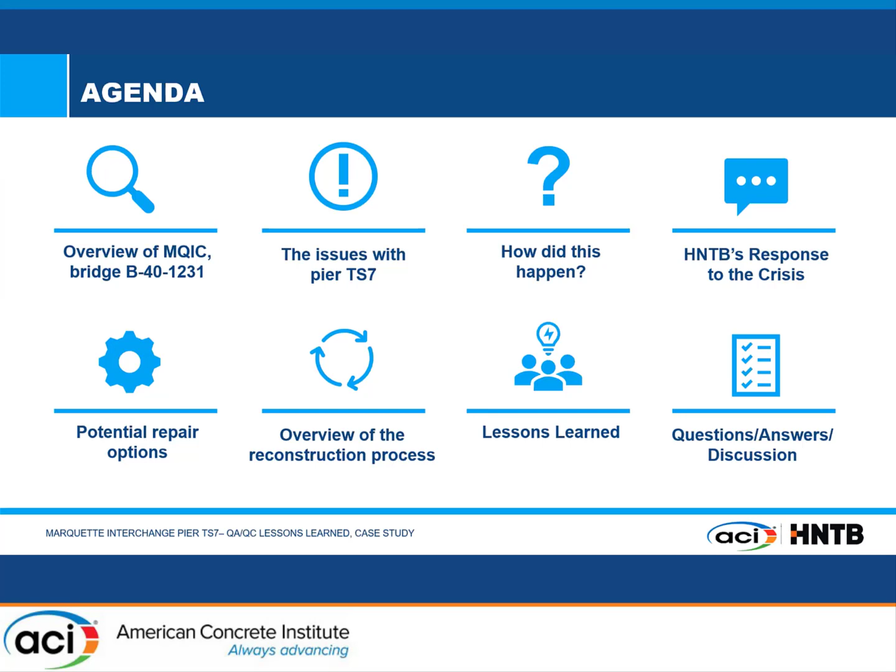So we got engaged right away, and went on the site and started taking pictures of our own. So this is the Marquette Interchange. I don't have enough time to explain all the ins and outs or how many people use it, but it's a beautiful project right near Miller Park.

HNTB has done a few projects here, including the twin cable stays and twin bascule bridges that you see in the background, only half of the symmetrical bridges, and the Marquette Interchange, as we said. All these curved girders were beautiful steel tub girders that also match the colors of the nearby Marquette University, that is the Golden Eagles basically, and they use blue and gold for their colors.

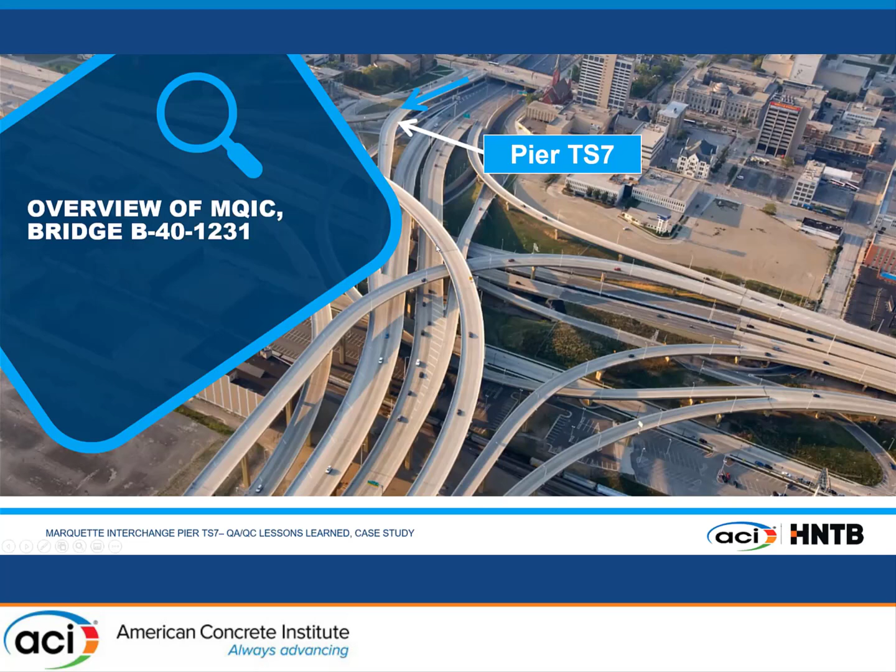This was the particular pier. It had interference from below in the clearance of the vehicles. So somehow somebody in the last moments had pushed the pier about 5 feet. So this is the particular pier and the cantilever. You can see they look like hairlines from afar, but they were not very small.

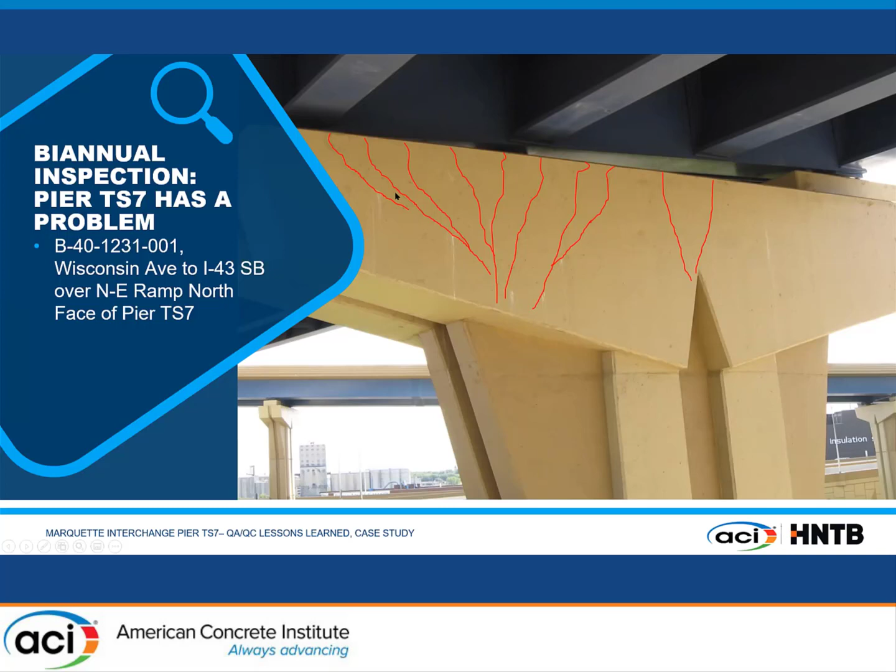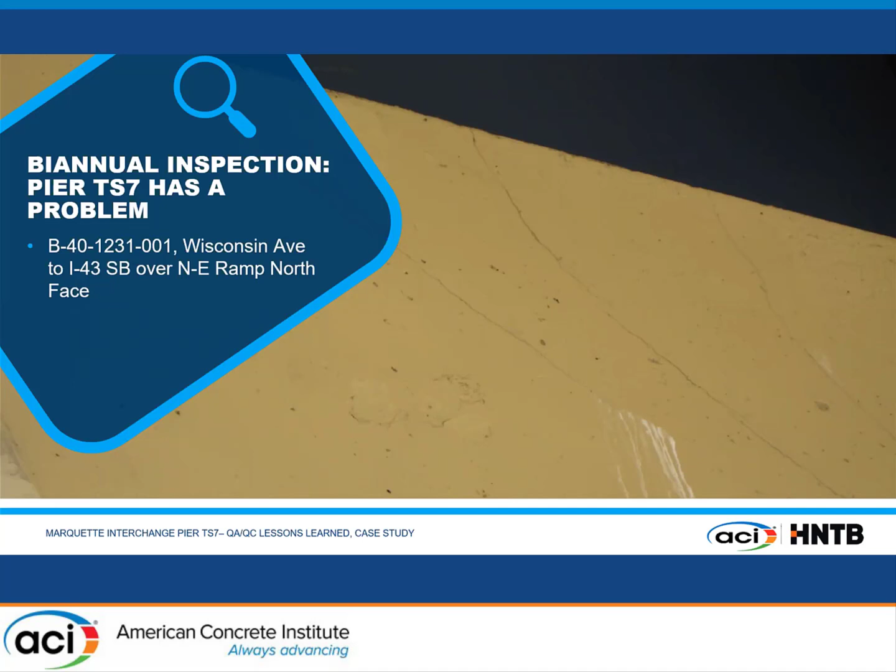Once you put the tracing on them, you can see that, when you went to that advanced concrete class in school, they told you, I bet, just like my professor said, that it is the shear cracks that you should watch for in concrete. So this was worrisome to us. And looking from a little closer, they're still manageable. You see efflorescence, but still scary that they were progressing as we move forward.

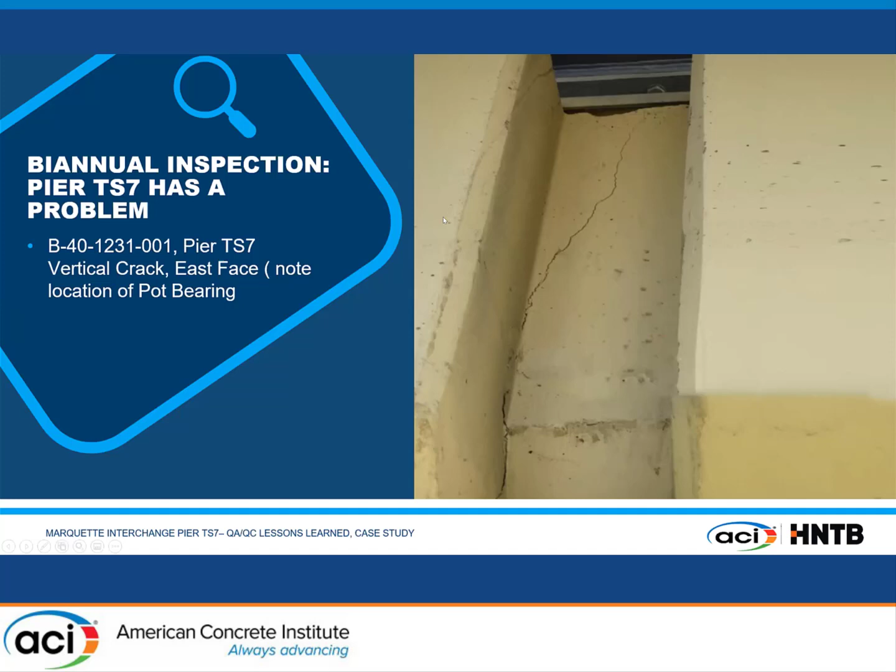There was also, because the pier for aesthetic reasons was built in like two panels. They weren't really panels, it was mostly ornamental, but they were reinforced accordingly. And there was a crack right in the middle of it, so that worried us as well.

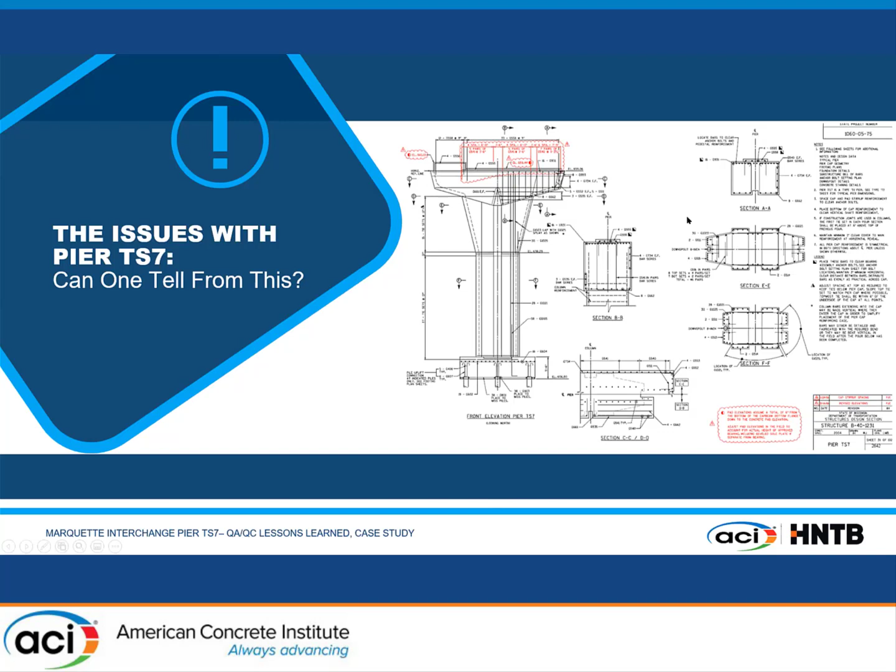First thing you do, you go back to the drawing board and you start looking at, hey, what is going on? Why is this pier cracking? And if you look at section AA at the top right of the screen, it looks like it's not reinforced very well. So you go down and you see what's wrong with this pier.

Piers were classified in certain groupings, and we had short and long piers, and then we had piers for one lane and piers for 2 lanes. So the cantilevers were longer. And here are some of the piers. So you see that these piers, if you see the types, 2 piers is TS5, 6, and 8. 7 is missing from here. 7 somehow was put together with the other piers, with TS1 through TS4.

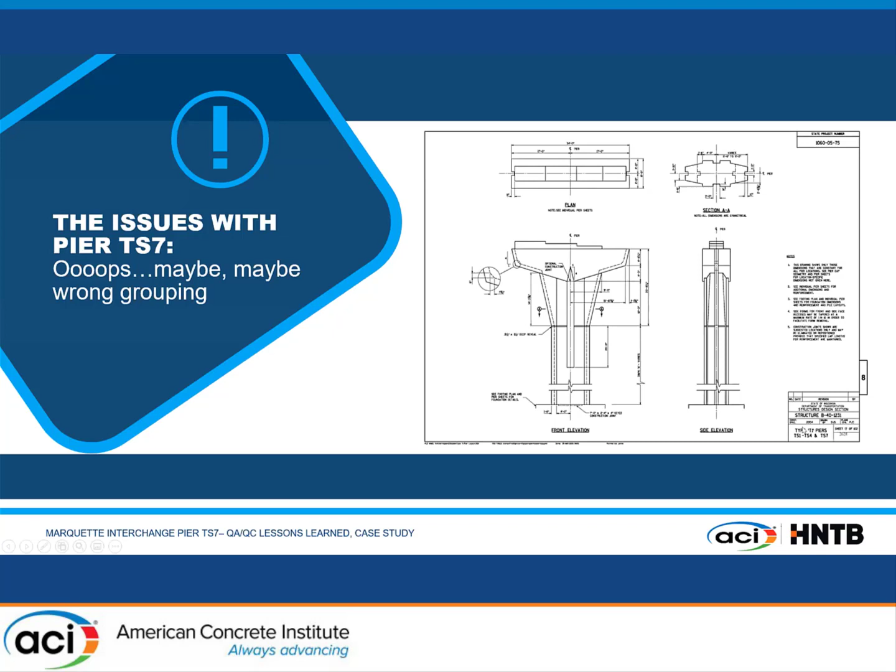Why was that? So we look at the regular piers for Group 1, and they were designed kind of like this, right? But then somebody got creative, got this pier and shifted it 5.5 feet this way because they realized that there was a conflict in the last few weeks of the project, and they said that this pier has been designed, let's just use it in here.

Just notice, I'm going to go back one slide again. Notice that this is carrying only one girder on the fascia over here, but over here now it's carrying basically 3 girders because it was an integral steel cap. All these three girders, the resultant goes right on the cantilever, which was not designed for and was replaced in a hurry. We couldn't figure out exactly how, 3-4 years after submittal.

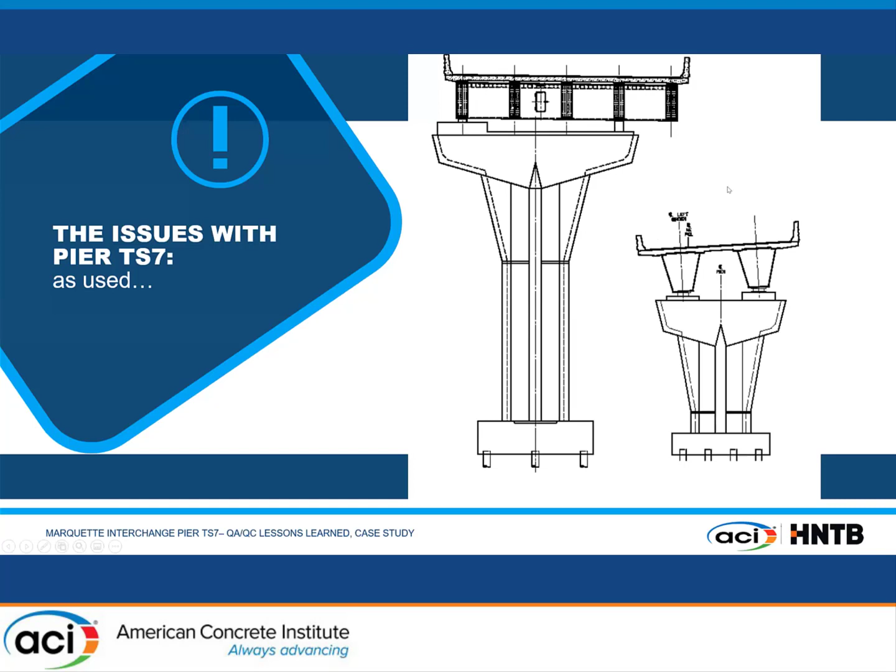But this is the piers. We got short piers and we got tall piers. And here in the bottom, if I was to draw a vehicle coming on the shoulder, you'd see that if this pier was 5.5 feet, it would interfere with that vehicle, just like that.

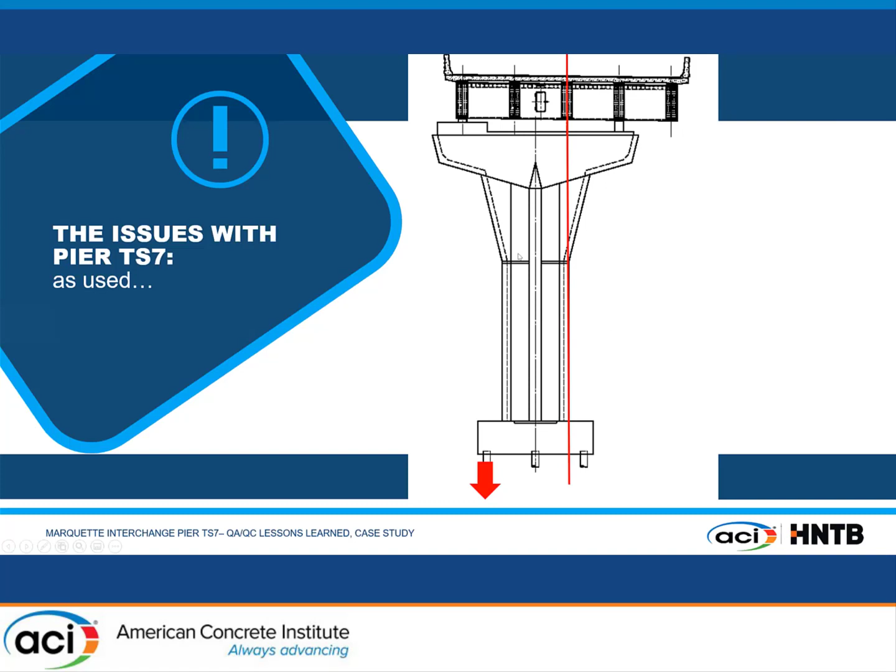Okay, and that's why that shift was done. So all of a sudden, you got the resultant of all the forces, the reactions coming into the pier with an offset of about 5.5 feet. What that causes is not only the cantilever, the whole thing was in trouble. The shaft and even the piles were in uplift.

But hey, it had not fallen. The beauty of concrete, right? It offers ductility and it tells you that it's in distress. So we were lucky that way. It was carrying live loads for 2 years, and nobody had noticed any serviceability issues.

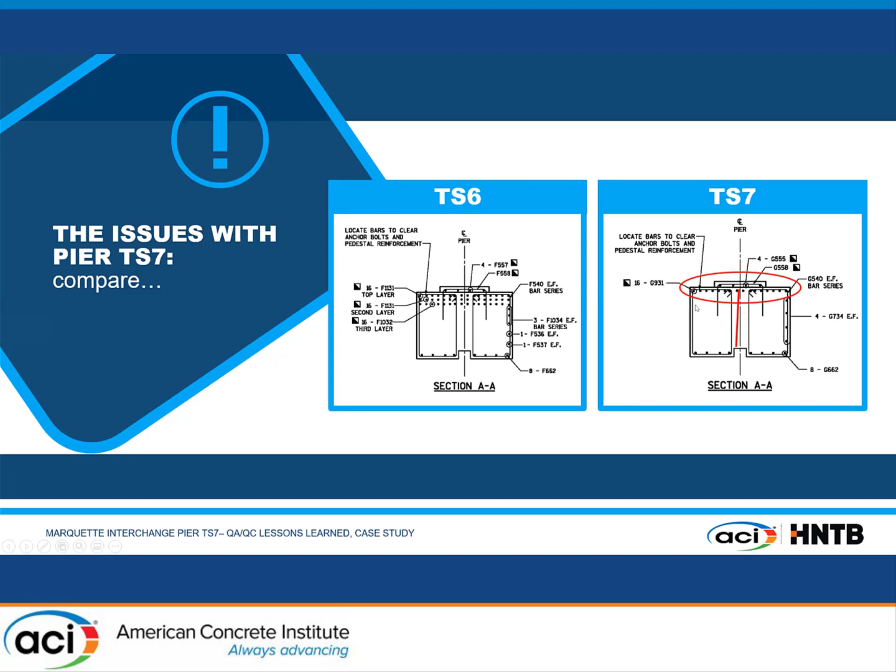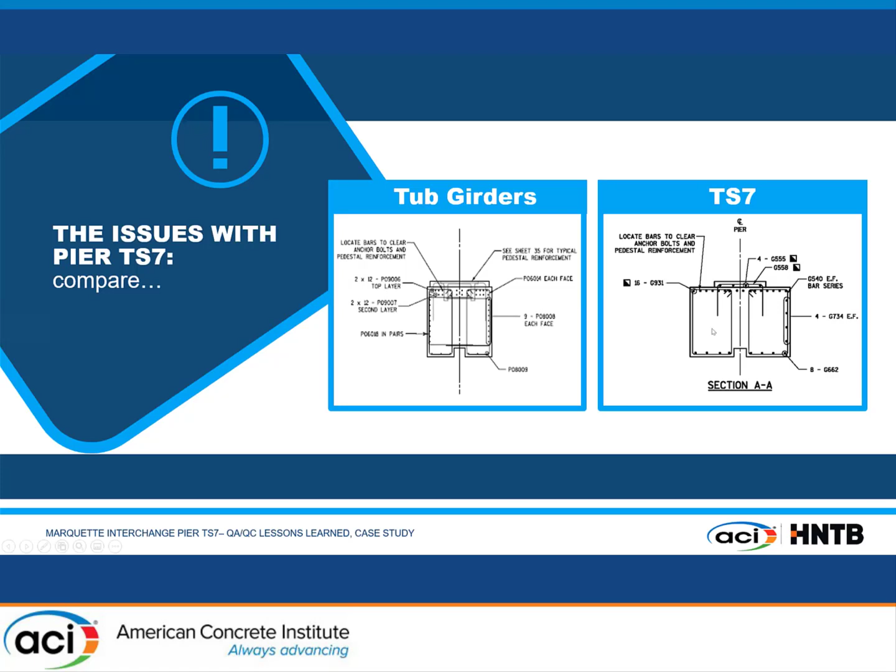The other thing over here, you can see that this crack happened right in the middle because it was reinforced with 2 hoops around. This never happened in the project with steel tubs because we had put on top of it also an overall stirrup that took all of that. You can see TS7, this was for tub girders that we designed, and you can see that there is a stirrup that envelopes everything. And over here, these are 2 separate stirrups that are not linked together except for that U-shape that goes on the bearing, only at the bearing location.

We went through hoops to verify that, hey, it's not fallen. Maybe there is some capacity. You can see that even for self-weight on service load, V only for dead load was at 114%, never mind live load. For moment was below, and V total, 81%. So live load, dead load for the service load, nominal, no factors, we were at 81%. So well below the acceptable. There wasn't much. Then in the pile loads, you can see axial capacity, 0.7 demand capacity.

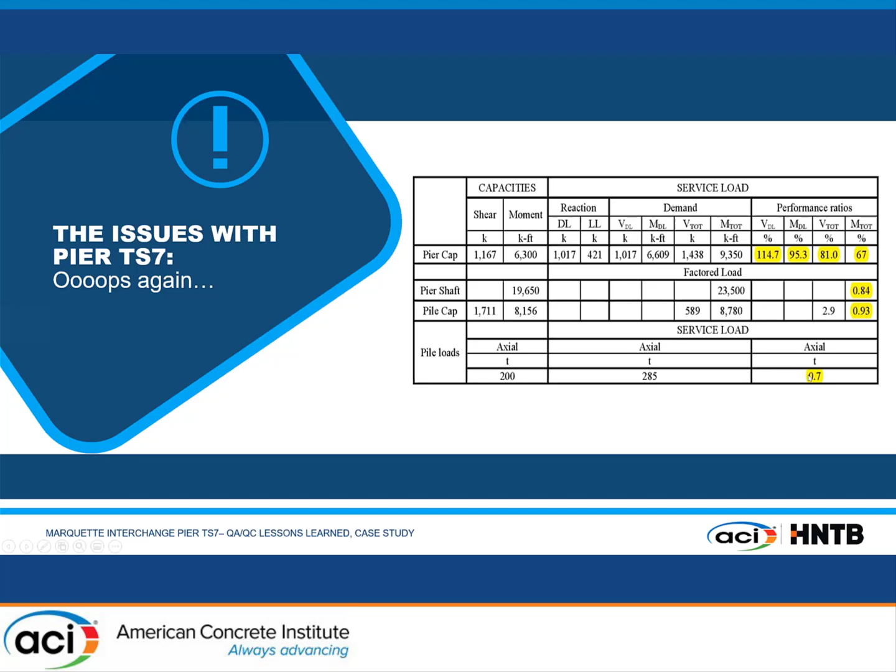So it was scary. And it was the weekend before Labor Day in Milwaukee. So we got called in, and we never went home for 2 or 3 weeks working on this until we put it back on track. I'm not going to talk much about the logistics and living through it, which was a story in itself, with the newspaper and all the commentators saying, hey, who did this should be hanged in Milwaukee and stuff like that.

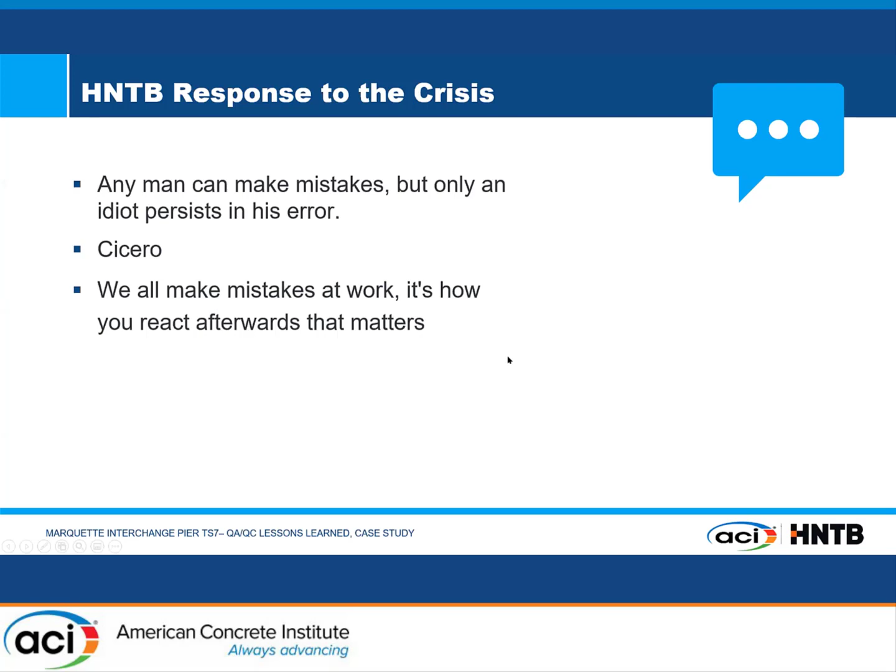But at the end of the day, we realized that, hey, you do 256 piers, sometimes stuff like this happens. So any man can make a mistake, but only an idiot persists in his error. So we couldn't go and tell the dude, yeah, don't worry about it. This thing was doomed. So we all make mistakes at work. It's how you react afterwards that matters. And that was our motto. So we got with the DOT right away. We called the secretary. We said, close the ramp until we verify, and we put it back.

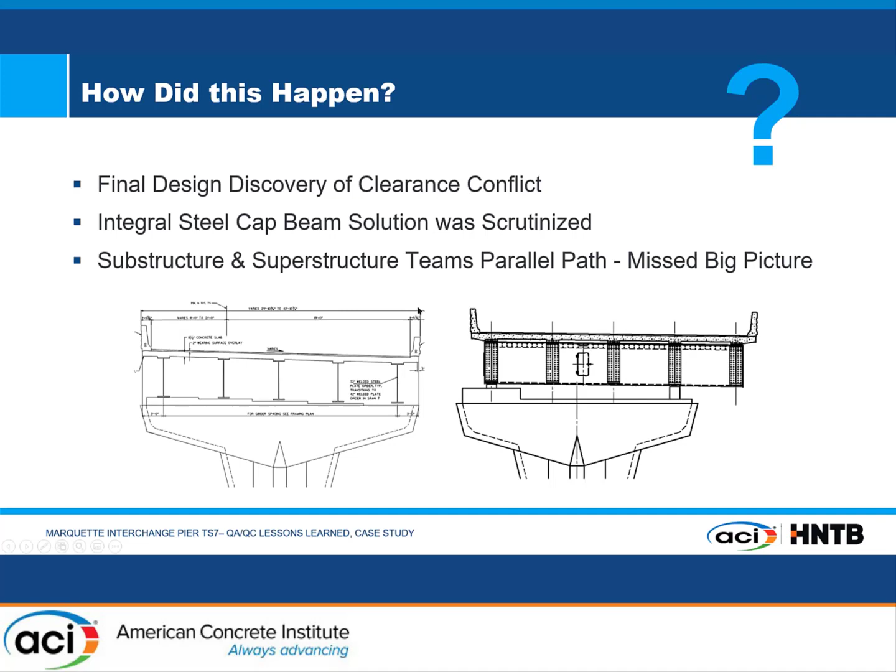Now that was waves through Wisconsin and through Milwaukee, right? It was, as I said, Black Friday was coming in, and this ramp led you straight to the biggest mall in Milwaukee. So you can imagine the pressure on the team to do that. So we looked at this, and I kind of explained how this happened already. You know, missed the big picture basically on the path, and the guy that was doing the final check on the clearances noticed it and notified them, and I think the issue was not escalated properly with the leadership team to address it accordingly. You know, somebody was assigned to just find a solution, a young engineer with little experience, I think, and that's what happened.

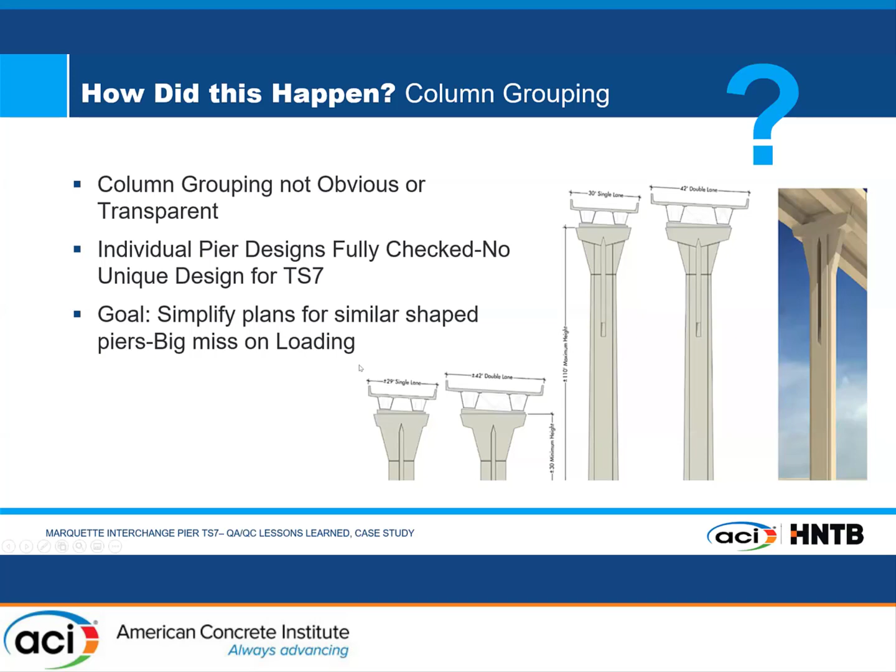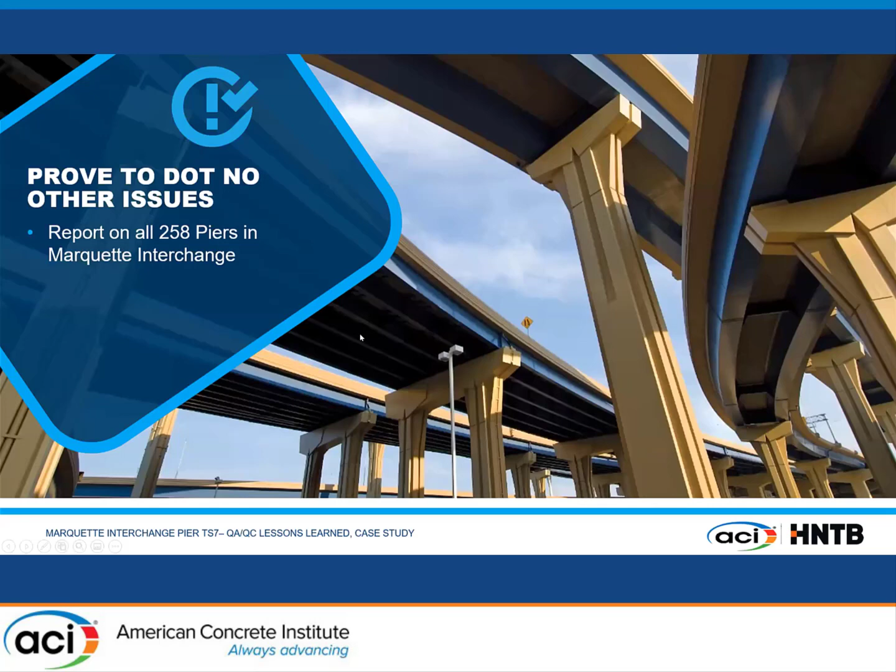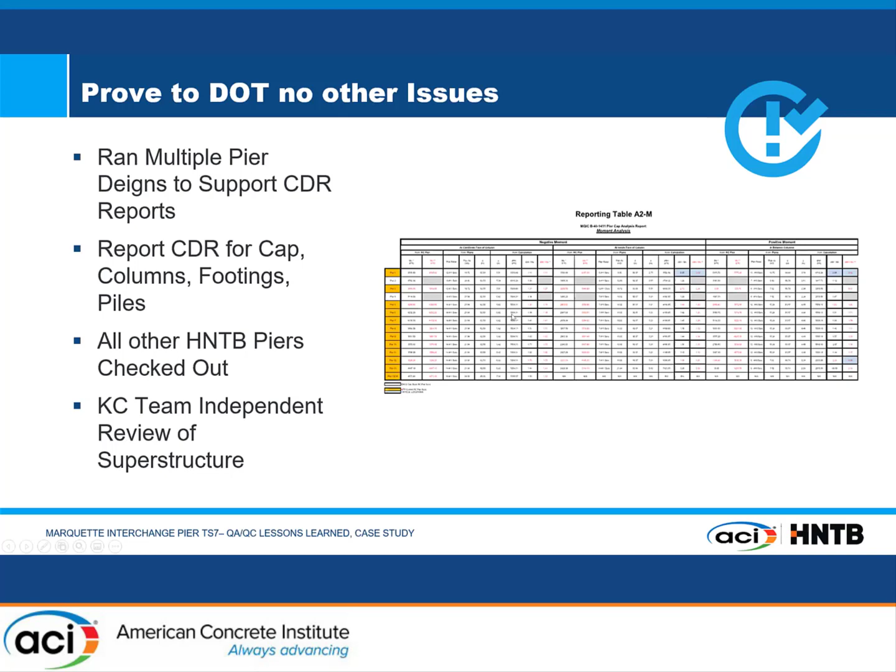These were the types of piers we had. The longest was 110 foot tall. The shortest was about 30 plus, and you can see single lane and double lane for the cantilevers. There's 258 piers on the Marquette Interchange. So of course, you know, you screw up one, the DOT asks you to verify every single one of them. So we went and we checked every single one of them, and there was only another one that we had a DB sub that had done slightly under-designed, like for 1 or 2%. That was something that we could repair easy with some FRPs.

So we go back and we say, okay, now we took blame. We said we're going to pay for this on our own tab and no cost to the public. So we start studying now. What do we do? First thing is to release the pressure, you know, of traffic. Where do people go? They just were offered a Cadillac and now they cannot use it. So we look at the pier. The pier is right here in the middle. You can see TS7. Where do we put it? Do we put it on the north side, or do we put it on the south side, the shoring tower, to pick up? You know, we decided we're going to replace.

Again, the timing is short, but we looked at all the options for repairing it. There were many options, and of course you can do them. But remember, we promised and sold the Cadillac to the DOT, and we couldn't make that a Chevy. We couldn't go back and say, well, sorry, we screwed up, but there's a repaired pier right in the middle of Milwaukee.

So also, people may not know, but until a few years back, although leadership of HNTB is in Kansas City, the president lived in Milwaukee and grew the firm from Milwaukee. So a lot of ownership on his side was that we were going to replace the pier, period.

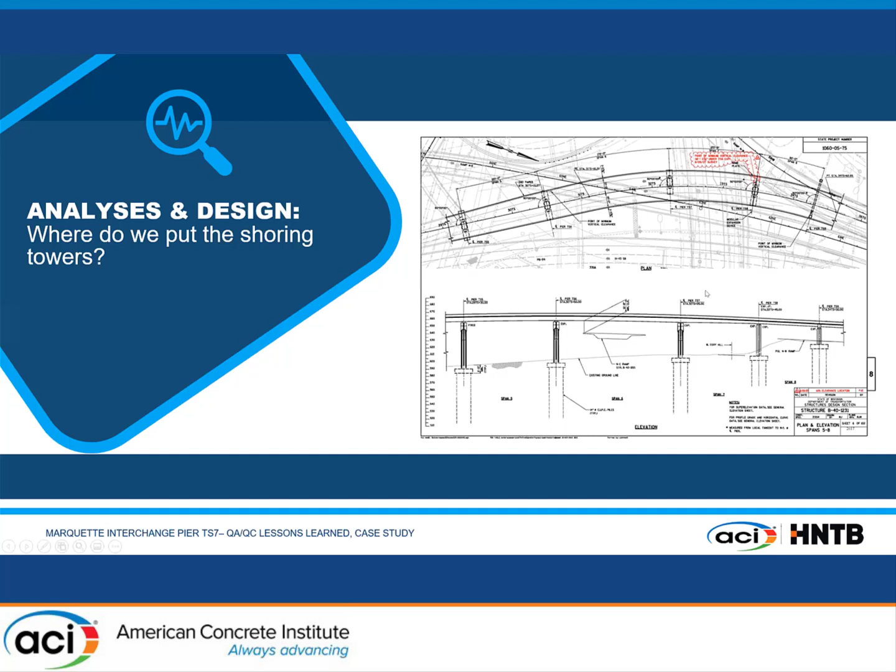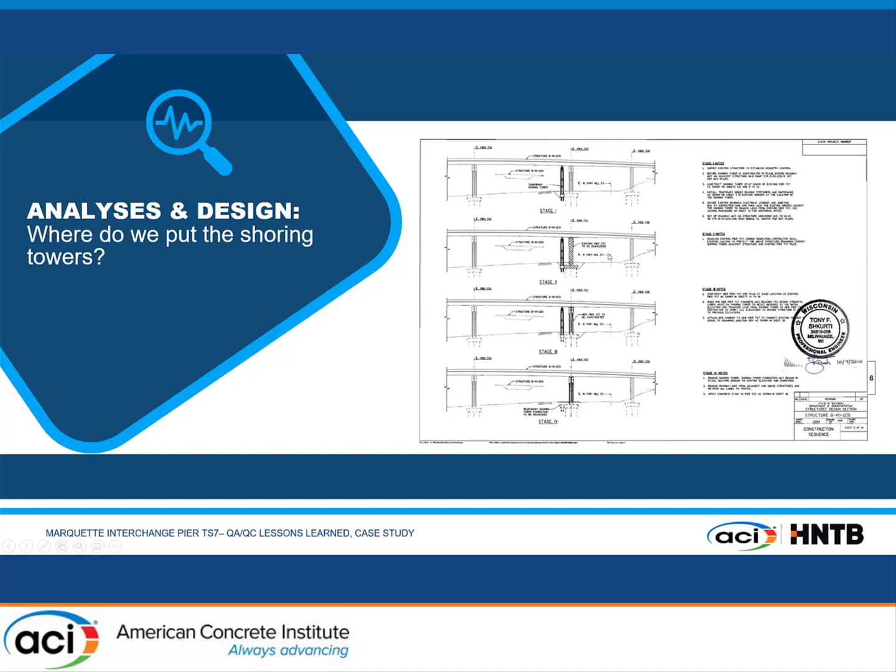So we looked at options and decided to put it on the south side because there are utilities and issues on the north side. We came up with an erection scheme and jacking scheme, that's how we're going to do that. We put a steel frame a few feet away where we had to put temporary foundations for it. There is an erection scheme here that we showed.

And we started thinking, can we put live load? This lane went from 2 lanes at the bottom right all the way to a single lane as it becomes narrow merging with highway I-94. So we decided, okay, we're only going to allow 1 lane. We're not going to allow build up of traffic as they're trying to merge in. And that was the only way we could make it work with the repair and the shoring tower.

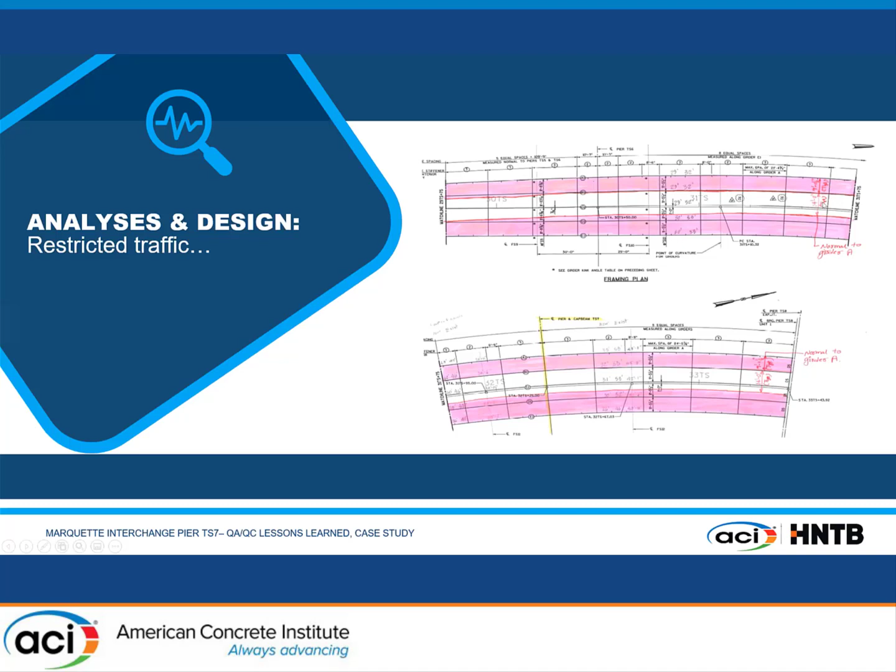We had to study renegade trucks that can get stuck, but only in certain places. We put barrels and traffic control to only allow 1 single lane in the middle so that people can go by with their daily lives.

Here's the shoring frame that we designed. We worked side by side. As HNTB, we hired a local contractor, the most trustable contractor we had, Zenith Tech, and I became a pretty good friend with the guy working side by side. We designed about 8 W360 columns that they had in stock. We didn't want to wait for orders.

So all this, now the clock was ticking. We had promised them before Black Friday we're going to open to traffic back, fully give them back the whole interchange one more time. That's the shoring tower.

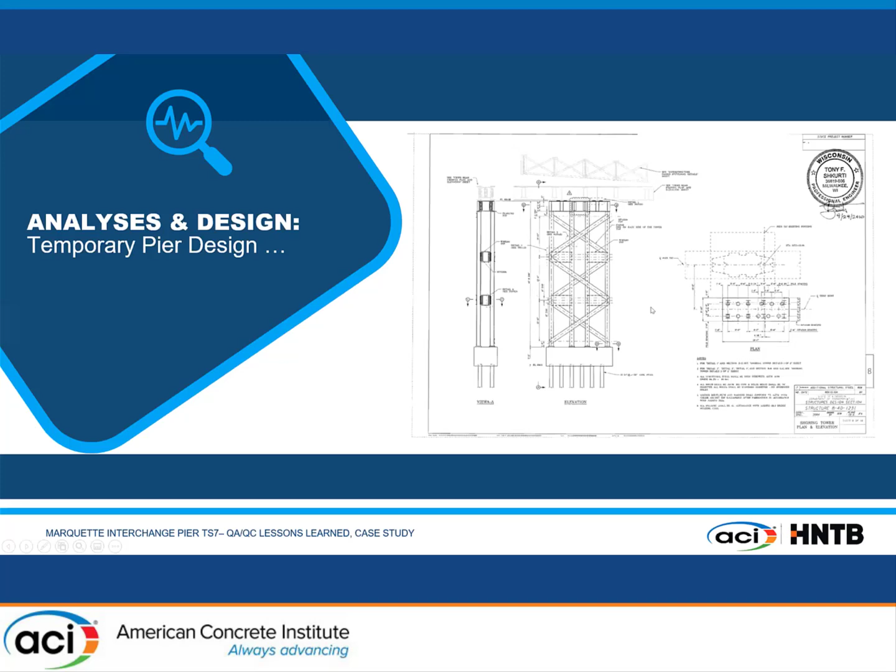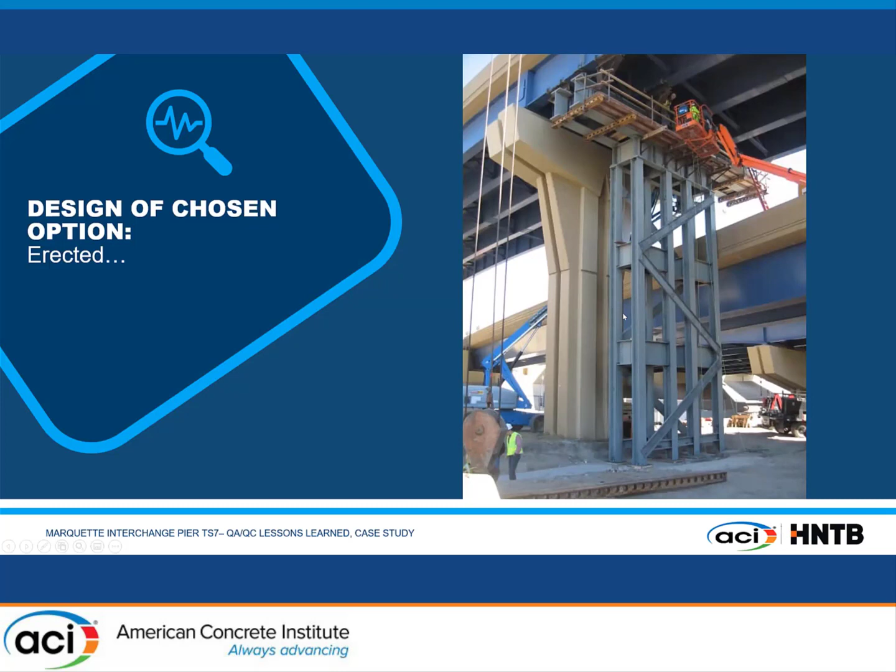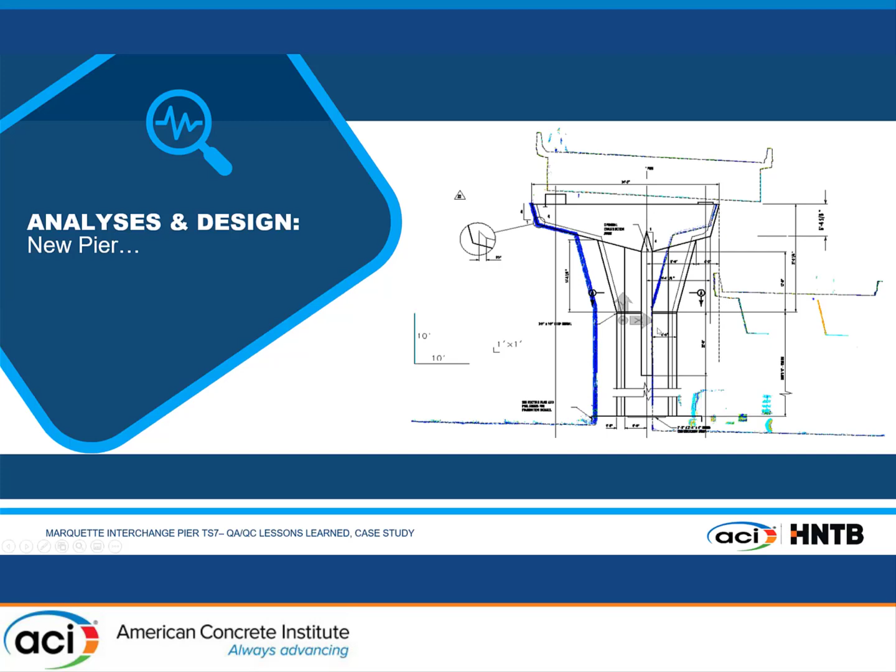So we gained back the eccentricity of 5.5 feet, but then we had to do the same in the foundation. Here's the design, with a short arm on the right and the regular arm on the left, with the same patterns that we had everywhere else. You see, we have 3 rows of reinforcement there.

And actually, after reviews and reviews, Wisconsin DOT said, 'Hey, why don't you put 3 or 4 more bars?' Absolutely, as long as they're still within the allowable rebar content, we're fine with that.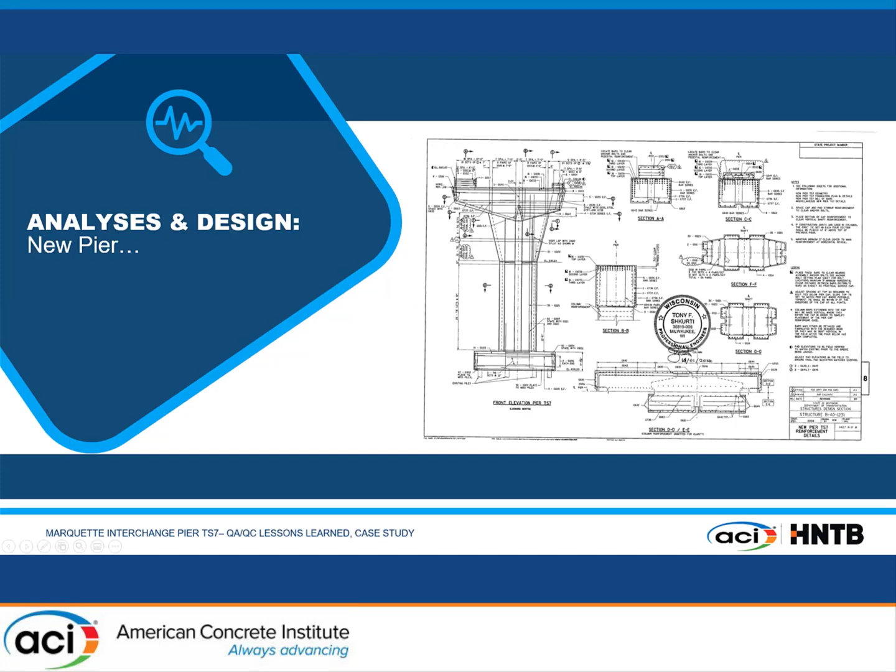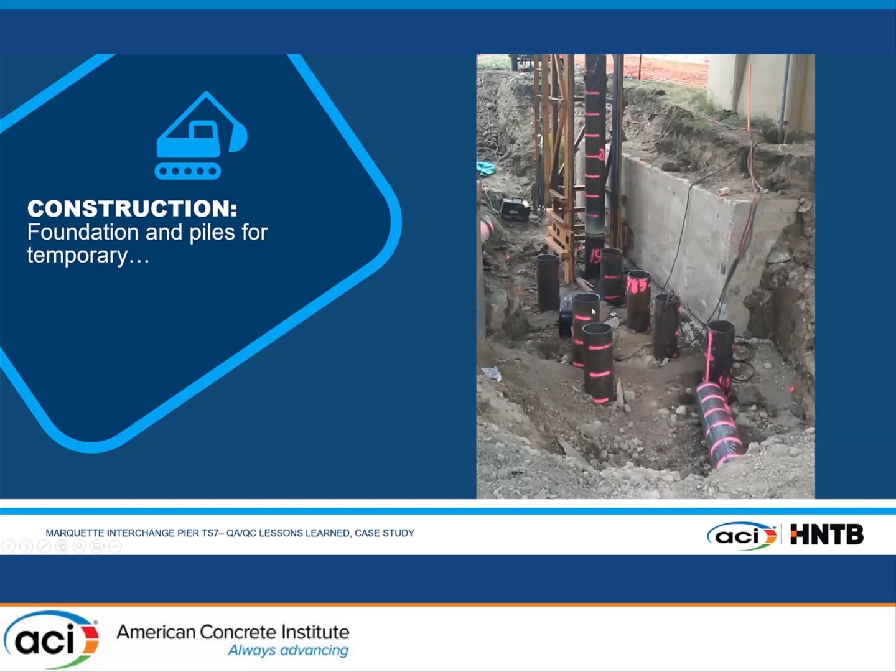Now, remember, as I talked about, we had to build temporary piles tough in the vicinity. Initially, we thought we had to do micro piles, but then the contractor came with a smaller hammer, and they could do it underneath the existing interchange.

So here's the pad for the new shoring. Because now you're going to jack at a different location where you don't have jacking stiffeners. The guys on the building side probably don't use jacking or bearing stiffeners as much, but in our case they're key because our loads are a little heavy.

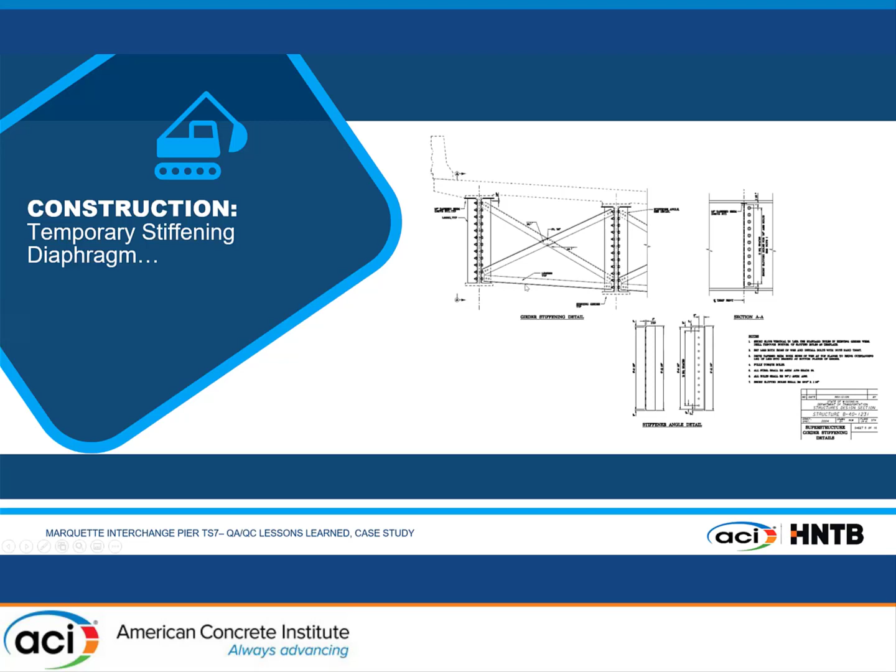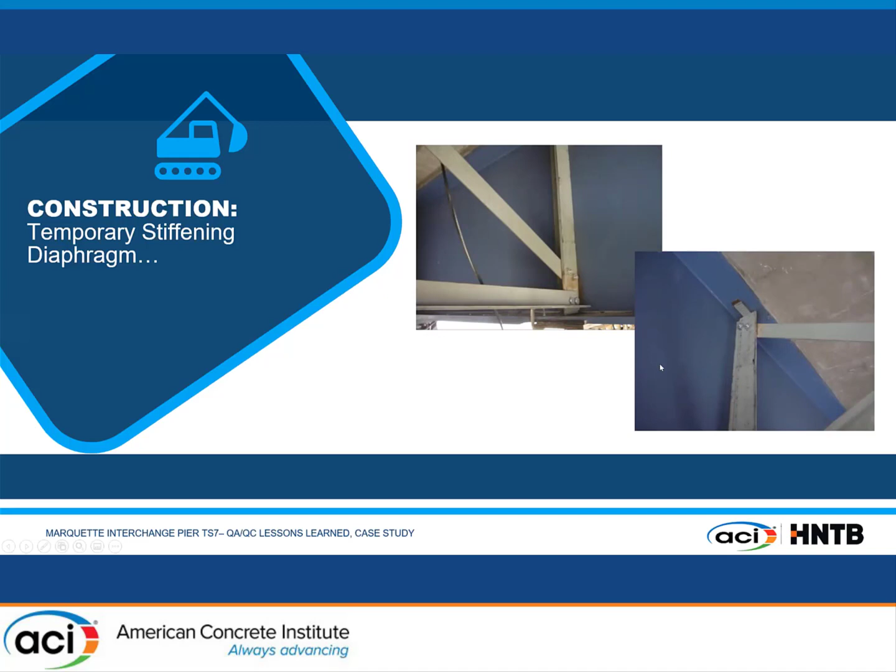So we ended up putting a temporary bearing at the location where we were going to jack the bridge. You can see it here, and we actually had a wedge installed, and then we pushed the wedge so that we had full contact to bear at the bottom. Here's how it looks before the frame came up—you can see it's about 20 feet away from the existing.

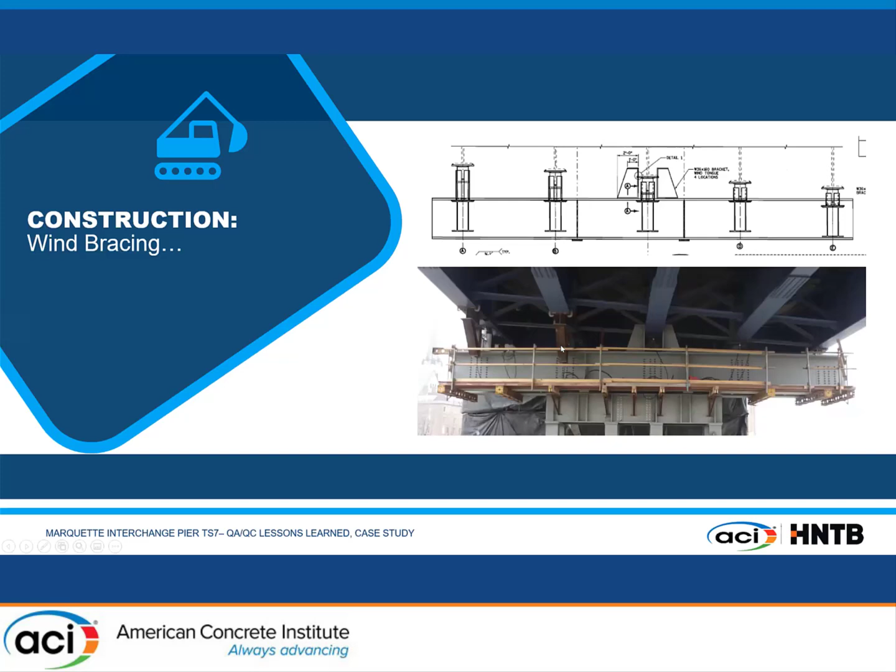We come in and we jack up. We put some wind bracing, of course. You can see, I believe, on the sides of these jacks, this knee bracing, and then longitudinally, you also can see the wind bracing in the middle girder right there so that it doesn't shift, because the frame was a little flexible, so we didn't want additional movement. We built the frame outside, and we brought it inside and we erected it.

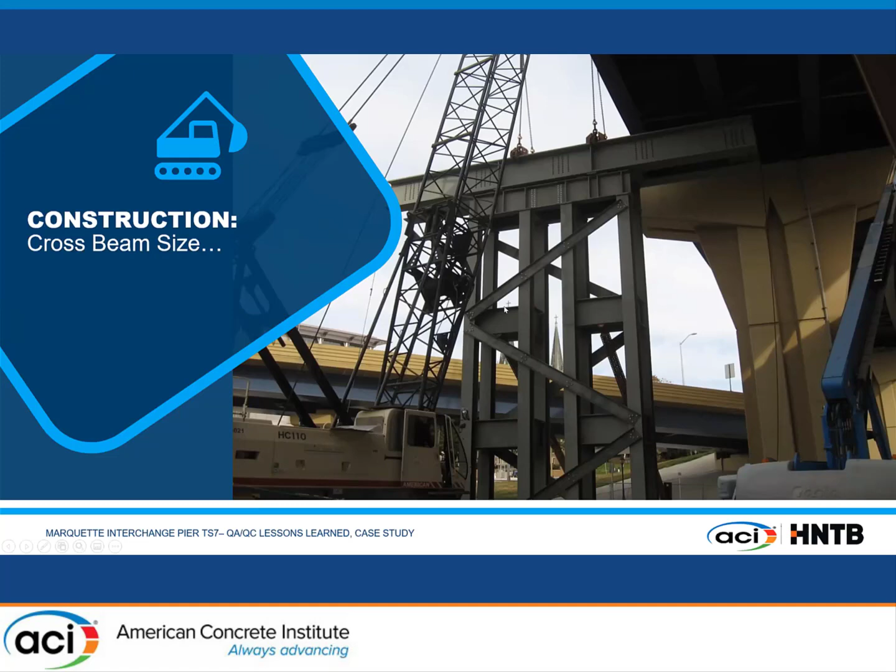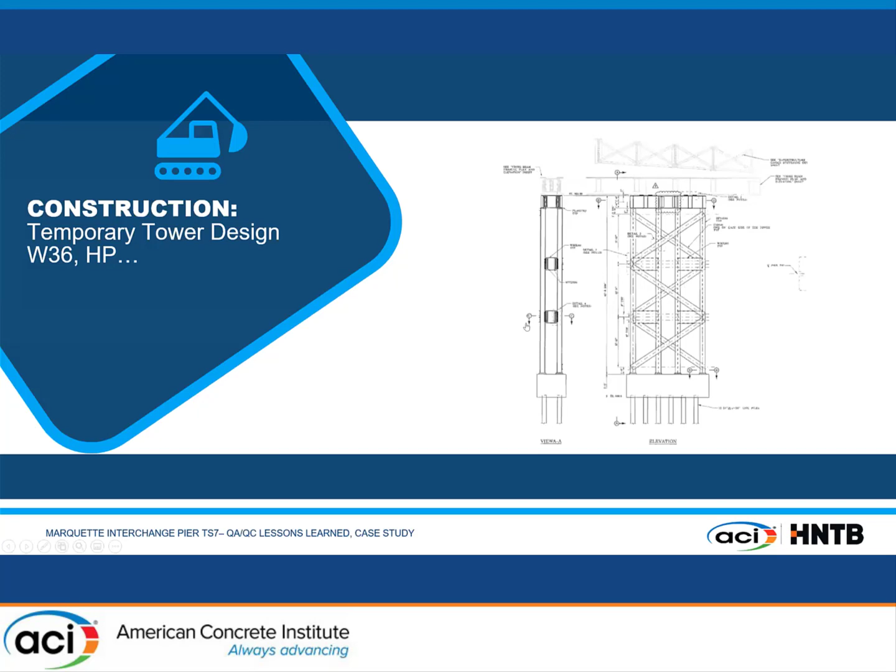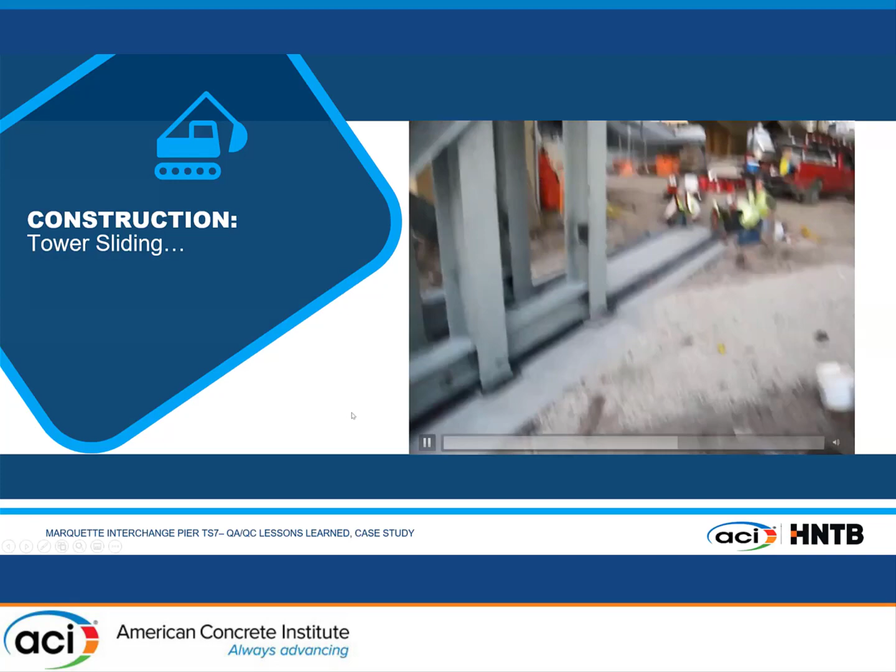We actually slid it in. They had some slides; they basically strand jacked it sideways horizontally at the very bottom. I think I have a video in here that shows it. Just with a hand jack, they pulled it in. They installed the sliding surfaces to make that easier. And it was a great operation. Everything was going great during the design and erection.

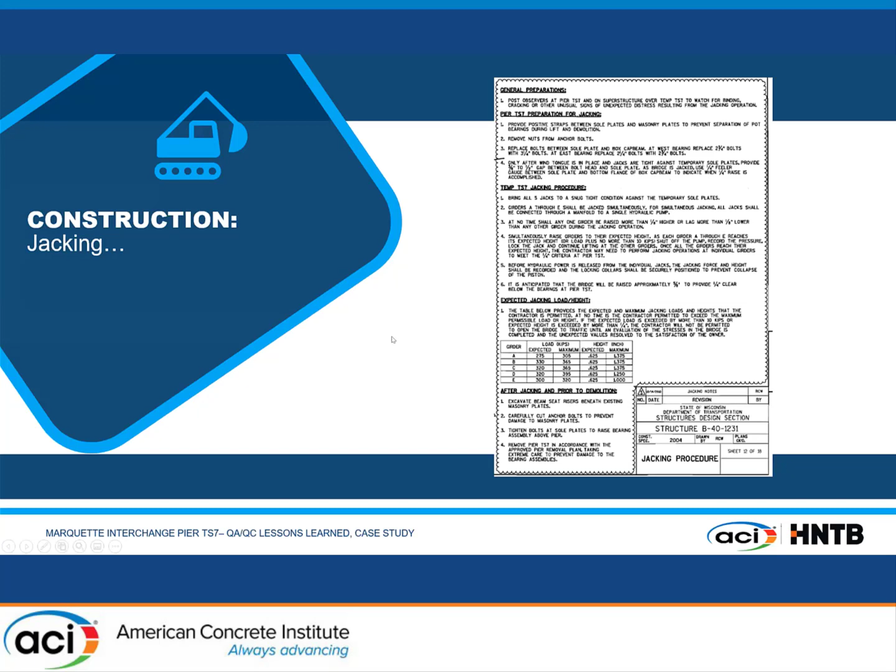So, very, very detailed jacking instructions, millimeter by millimeter, basically, with simultaneous jacking at all 5 girders so that we didn't have any differential. And there were red buttons everywhere. There was at least one person watching every jack, basically. You can see there as we're jacking.

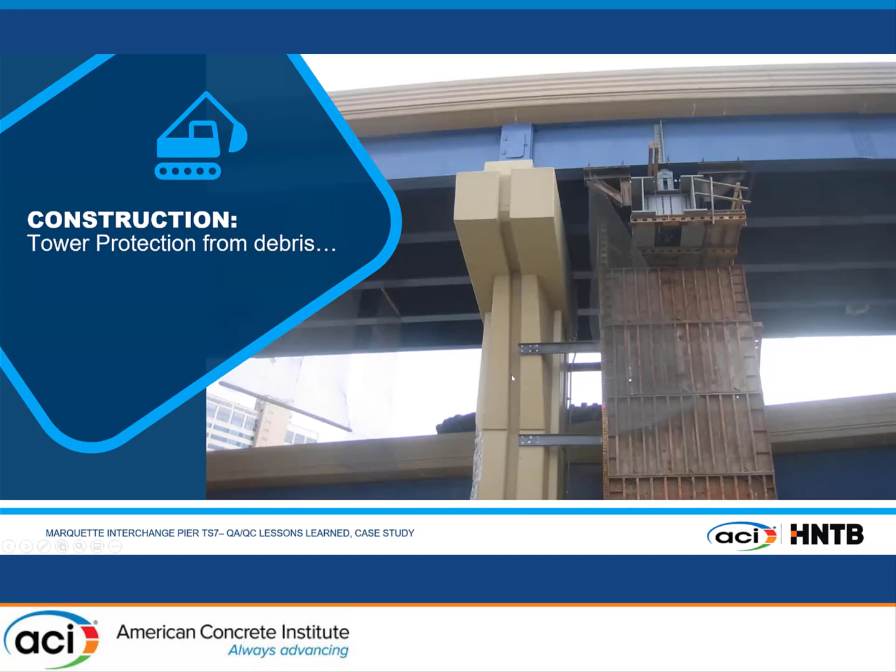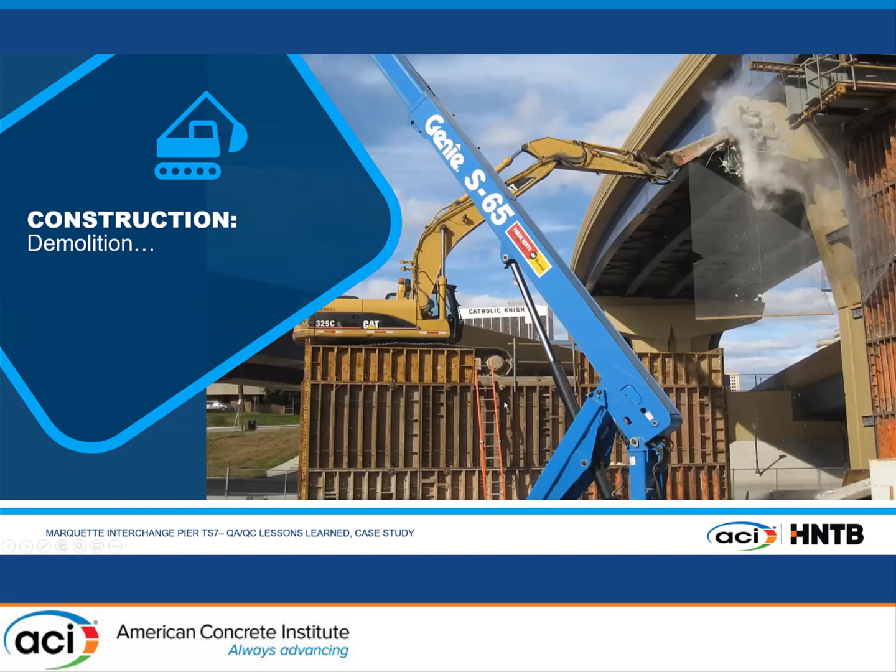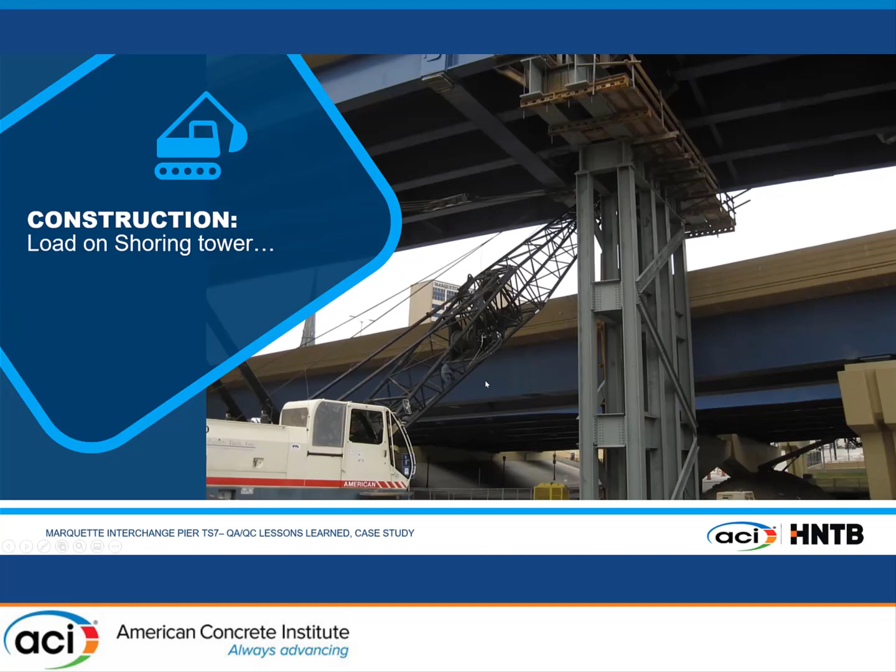Finally done. We're protecting the tower from debris as we're going to start demolishing. We're also bracing the tower during erection to the existing pier, and then we start demolition. Demolition continued, of course, and you can see some creative demolition, with raising up the equipment to perform it. And boom, the existing is gone, and the whole bridge is new, and we can take a sigh of relief finally after a month or 6 weeks of continuous headaches and sleepless nights.

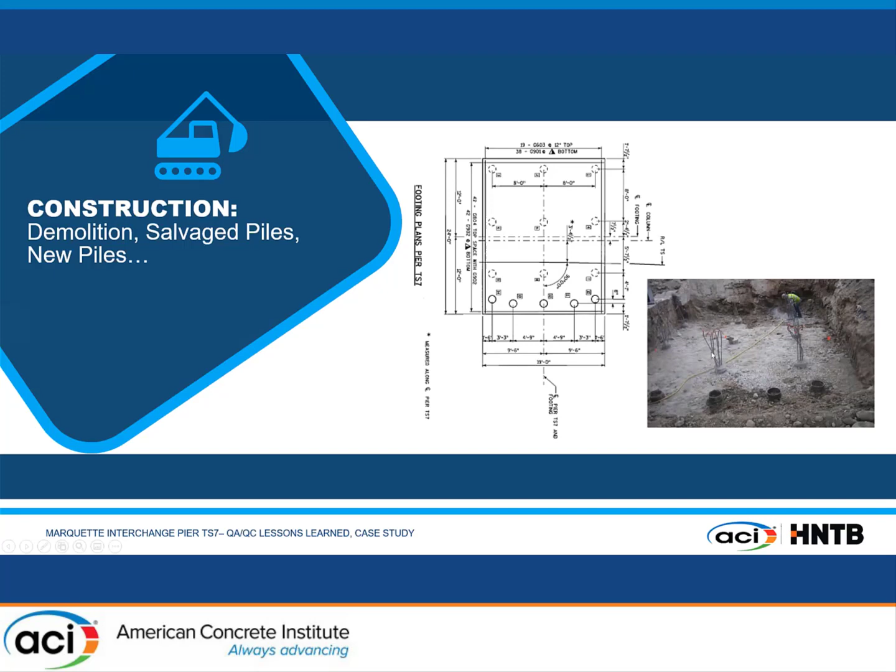Now, as you see, of course, we tried to salvage the existing pile, so we had the 5.5 feet eccentricity in the front, and you can see that we found a pattern that would work by using the existing and just installing 5 new piles. And those are the 5 new piles in the photo as well. You can see that these piles were also designed for uplift because there were continuity bars that were embedded, and they were carefully maintained.

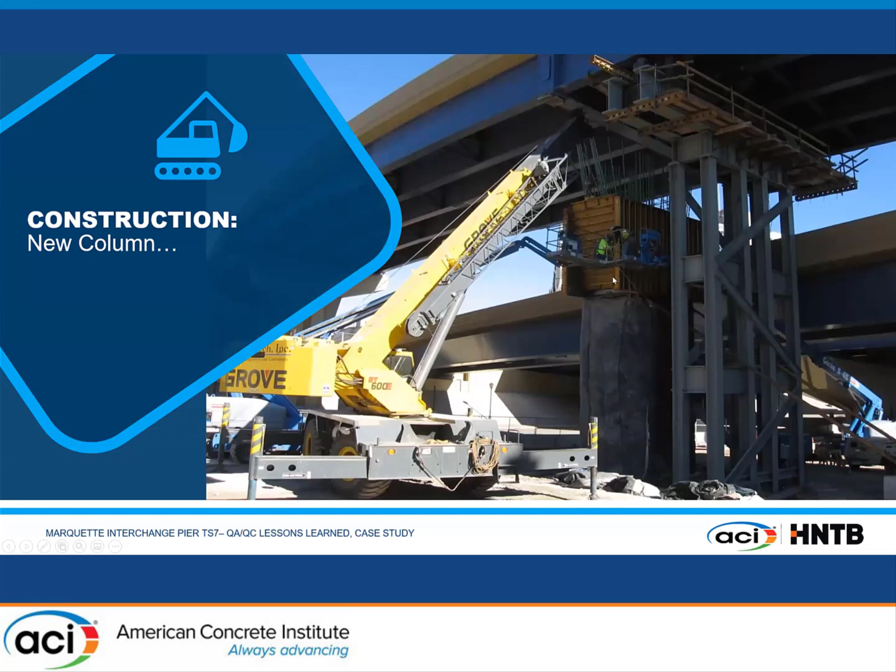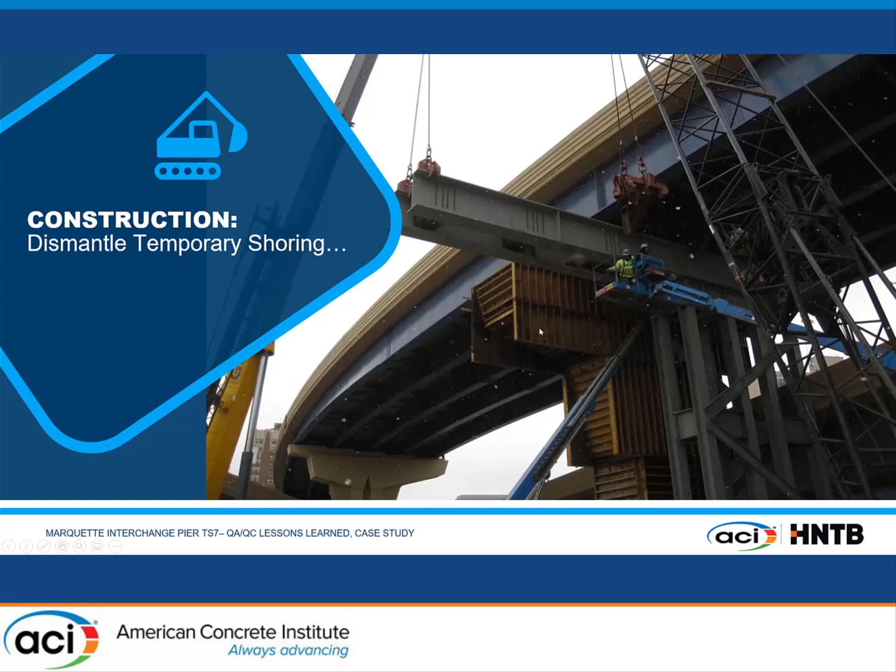So we're starting with the construction. Rebar cage has been built on the side. They bring it on site, start building up concrete little by little. Finally, release the jacks. The bearings, we welded them to the girder so that they wouldn't fall down. So when we built the new pier, it was easy to just install them exactly at the same location. We started uninstalling the jacking tower. Finally, there's the new pier of the Marquette, and traffic is back on.

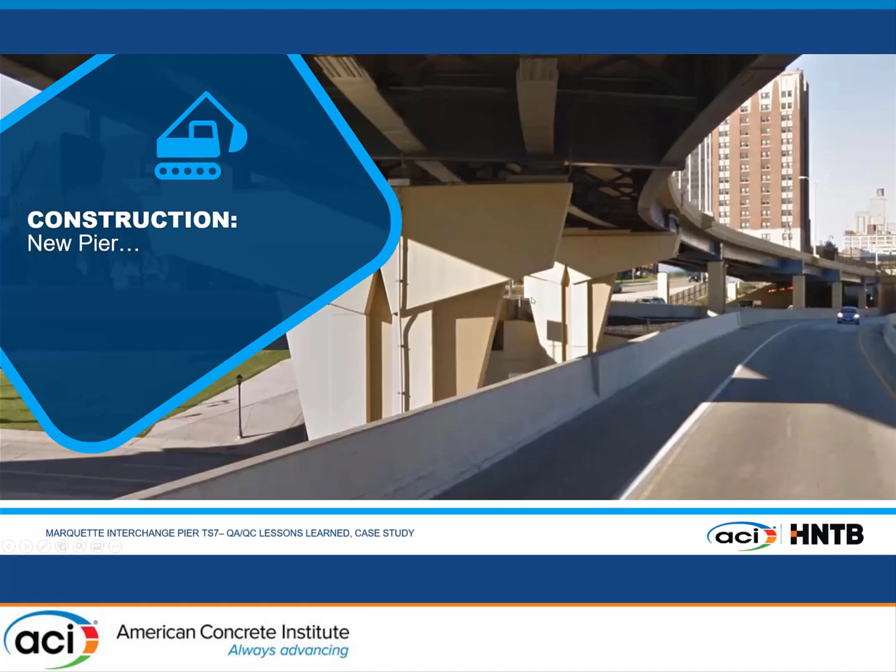Here's how it looks now. You can see the short arm. I remember this every time I go to Green Bay for a game. When I drive back, I show it to my kids as well.

So the lessons that we learned from this were mainly: be careful when you group design elements, and who is using those groupings. It should be somebody that has some experience and knows what it means to do that. Clear design summaries. Any doubt, design again. Perform early geometric clash detection. Conventional bridges can be complex. Quality manager and senior technical reviews early and independent from somebody that's not on the job.

But it gets really tough in the last 2 weeks or a month when you're still at 70% and the submittal is coming. And this is what causes a lot of trouble. The PM and task lead should do a mandatory cursory review before final. And we do those now. We've implemented all these. Makes me proud how the company handled the problem.

We owned it from the beginning. We came out, and we gave it back to the public and to the DOT. And actually, the state bridge engineer was asked in the presentation that I attended, after he showed how great this was handled, "Did you end up suing the consultant?" And he said, "Suing them for what? They came in, they owned it, they paid for it, they hired a contractor. We looked over their shoulders, and everything was done properly."

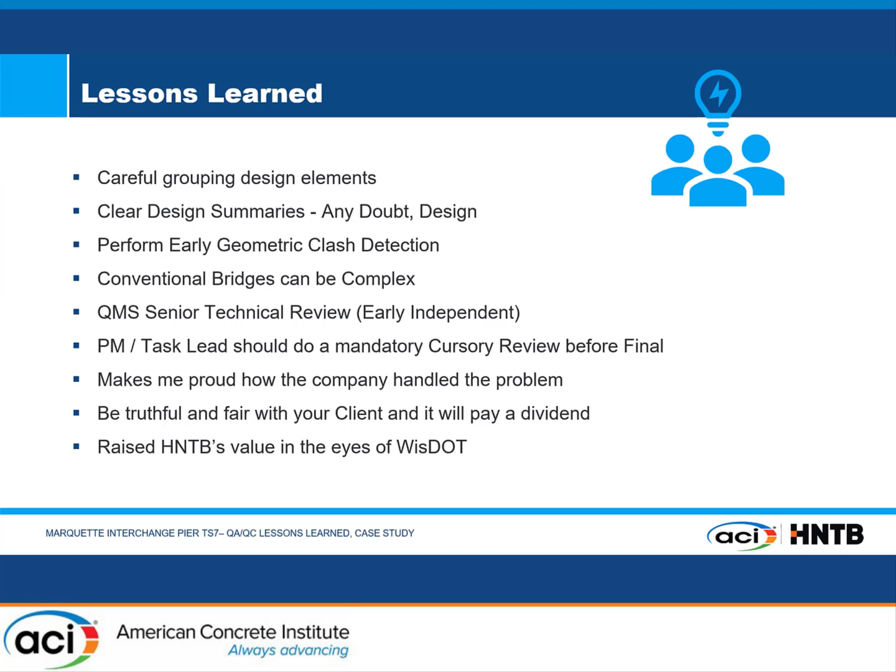And you lower your head, and then they say, "No, no, no, you shouldn't be ashamed of it. We heard what you did. We applaud you." So it did raise HNTB's value in the eyes of WisDOT and other clients in the Midwest and beyond. So that was my presentation.

I've never done it this fast, tell you the truth, because the stories are long, and it would usually take 45 minutes to an hour. So I try to cut it as much as I can.